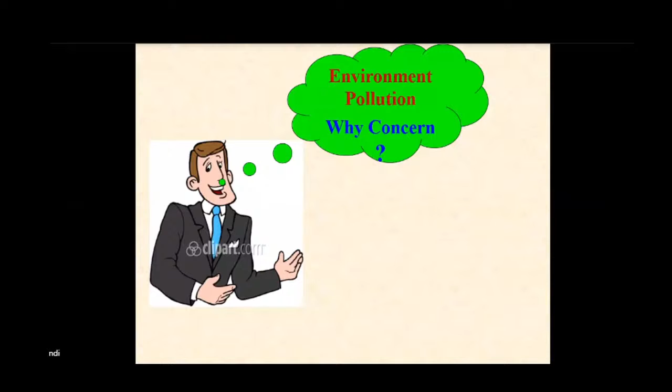Now, why environmental pollution? Why do we have to be concerned about this environmental pollution? That is mainly because our power generation—as of now, our installed capacity is around 374 gigawatts. Of that, almost 63% comes from the thermal group. That is a major concern about our environmental issues, and presently major power comes from fossil fuel.

Also, one more major concern is that some of the plants installed during the 70s and 80s have very, very poor performance. Still, because of economic considerations, this continues, even though a lot has been done by the government to revamp those power plants. But still, some of the power plants are operating with very poor performance, and that is also a major concern about environmental issues.

Hesitation in technology upgradation is also a major concern, because almost all the older power plants used subcritical cycle technology. Now supercritical has come, ultra-supercritical has come, and IGCC technology also has come. But even with all these advances, many power plants still work on subcritical technology. Also, technology upgradation like variable frequency drives and so many other things—many power plants still have not adopted them. That's what causes this environmental concern.

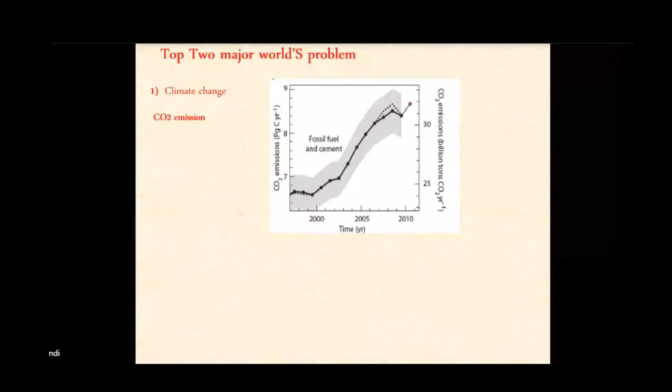Now, there are two top major problems in the world: climate change and CO2 emission. CO2 emission is the major concern. You can see the graph going very steep between 2000 to 2010. Now it has slightly steadied, but it is still increasing.

The effects will be global warming and sea level rising. These are the issues with CO2 emissions, because if CO2 emissions increase, it will cause ozone layer depletion. Those are the issues with CO2 emissions, which we will study in detail.

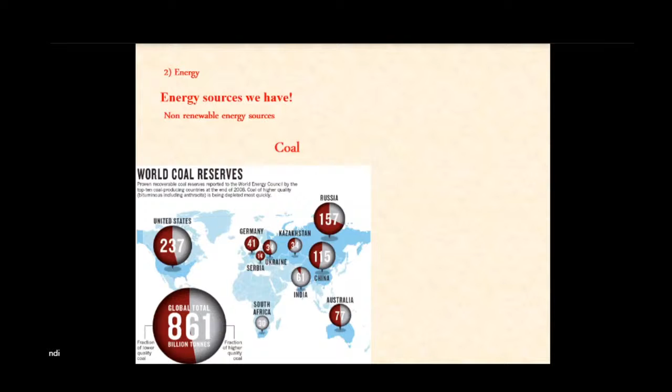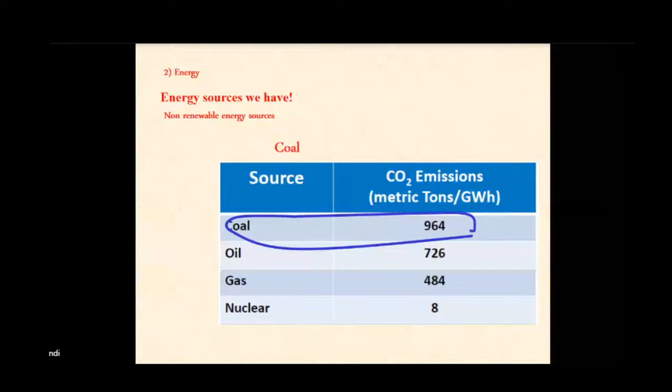But one more thing is renewable energy is also taking over because of the present government's initiation. We will discuss this in the next slides. Okay, this is regarding carbon emission.

The major difference is because their per capita energy consumption is very high. US is almost around 12,000 kWh per person per year, whereas in India it is hardly 1,020 kWh per person per year. That's why we have carbon emission per capita energy much lower than the world average.

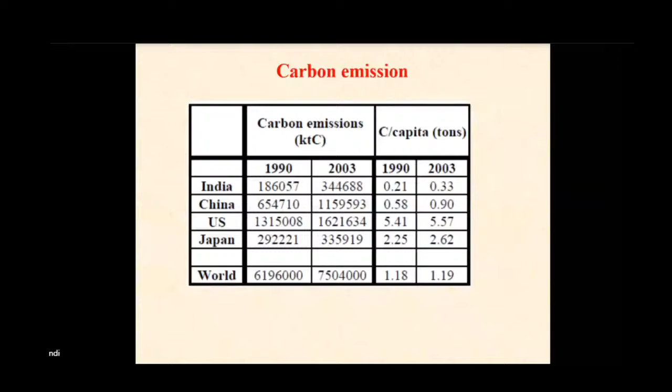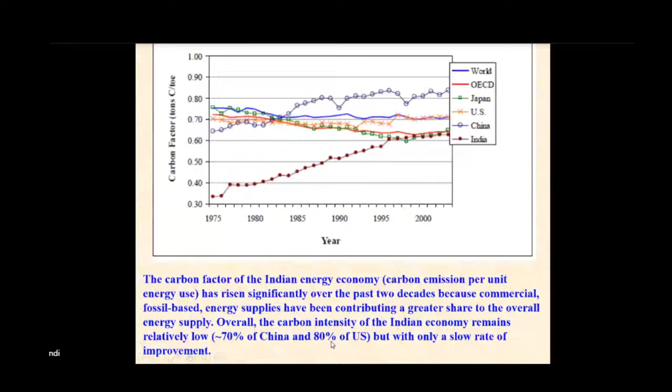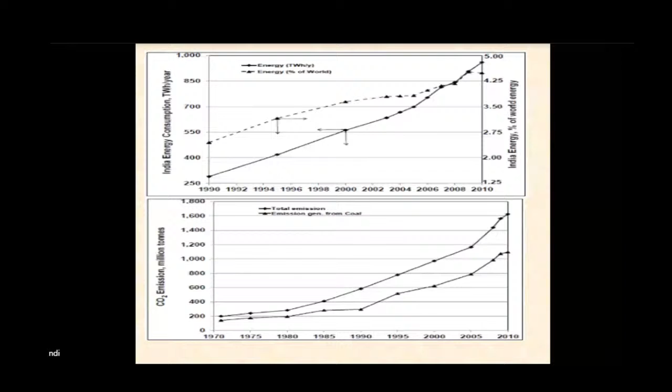Almost around 5 mega power projects have come up, consisting of around 800 megawatts into 5, that is 4,000 megawatts in a single station. With initiatives like this by the Government of India, along with private generating companies and renewable energy systems, our peak demand and supply gap has reduced.

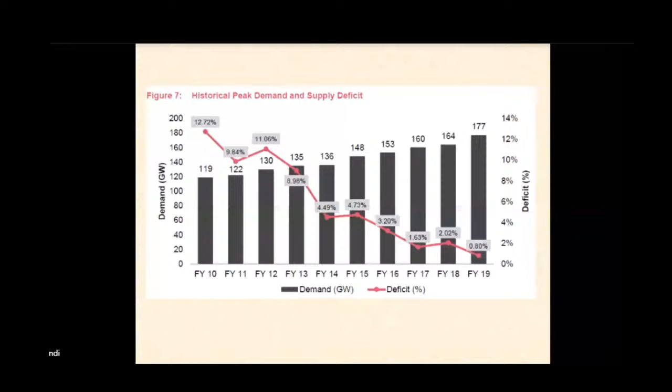Almost it is around 0.8, that is not a major concern. Similarly, regarding the energy supply also, the deficit and demand gap has come down to almost 0.6. Many power plants are being forced to take outage because of non-availability of demand. Now this is the scenario.

This is the installed capacity in India as per August 31st, but as of now it has increased to around 374 gigawatt. Another 2000 megawatt has been added in the last 3-4 months.

Now, why I'm showing this is you can see coal and lignite based power plants are almost 55.3%, gas is 6.7%. Oil has come down because oil based power plants have been converted into natural gas. One example is Tata Power's 500 megawatt oil based power plant, fully converted into natural gas.

Hydro is around 12.3%, nuclear is in a slow phase at 1.8%. Renewable is the major one, almost around 89 gigawatt power is being generated. That's our Prime Minister's aim also, by 2022 it will be around 175 gigawatt, our plan to set up renewable energy.

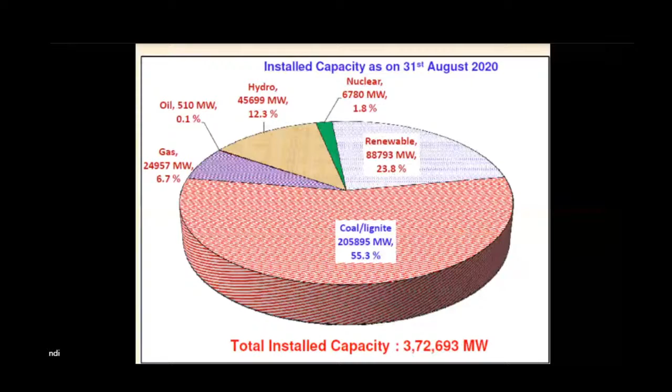Regarding the generation addition capacity, you can see here still thermal is the major addition, but after 2014 onwards a lot of renewable energy power plants have come. You can see the change here at the bottom, the green has increased, mainly because of the government's initiative to go for renewable energy.

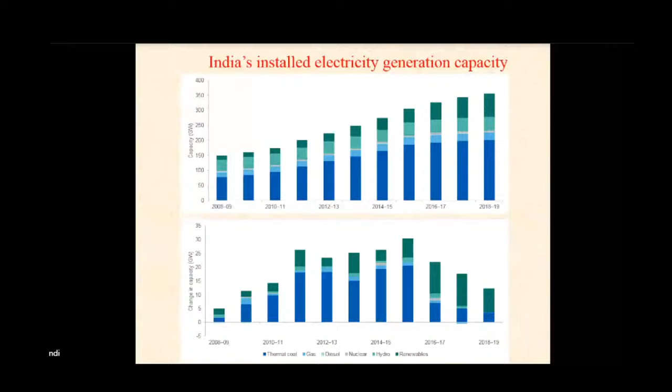Our Honorable Prime Minister and the France Prime Minister started the ISA, the International Solar Alliance. In that, 121 countries have come together, initiated by our Prime Minister. These two countries are going to train them and give technical support for setting up solar PV power plants. Under that, we are going to start some MTech program also in REVA University to train engineers from overseas, from the 121 countries.

As of June 19, coal generation is around 201 gigawatt, renewable is 79, and hydro. By 21-22, our Prime Minister mentioned in one of the conferences that renewable energy will go up to 175 gigawatt. By 26-27 itself, our plan is to go for renewable energy more than coal-based power plants, that is 275 gigawatt, to reduce coal. This will help in controlling our environmental issues.

The major concern is emissions with respect to India's average, which is 0.955 kg per kWh. SO2 is slightly on the higher side, but still it is less for Indian coal. And NO2.

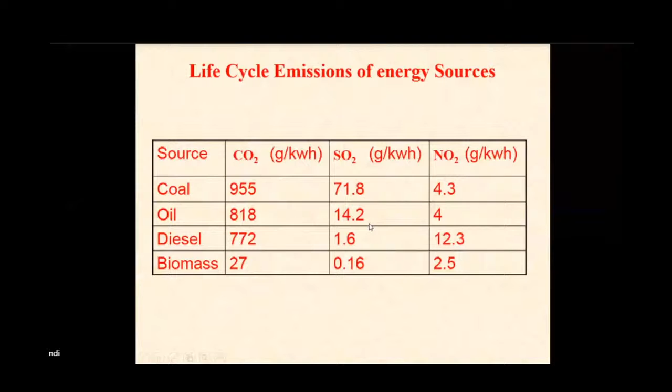This is based on data available from the internet and literature survey I have done, calculating the major concern about CO2. A person releases CO2 at around 42 gram per hour, that comes to around 1 kg per day. To compensate that, trees absorb the CO2 and release oxygen.

Considering around 130 crore population, 18 trees per person are required to compensate that CO2 emission. So at least 23,400 million trees are required to compensate for the population, for general ecological balance. Earlier, whatever CO2 human beings exhaled was absorbed by trees, and they gave out oxygen that was taken by humans. That's how the ecological cycle was balanced.

Now, because of industrialization, technology upgradation, and the addition of lot of transportation sectors, electric vehicles, power plants and all, the CO2 emission has increased. That's what I am comparing with the thermal power plant.

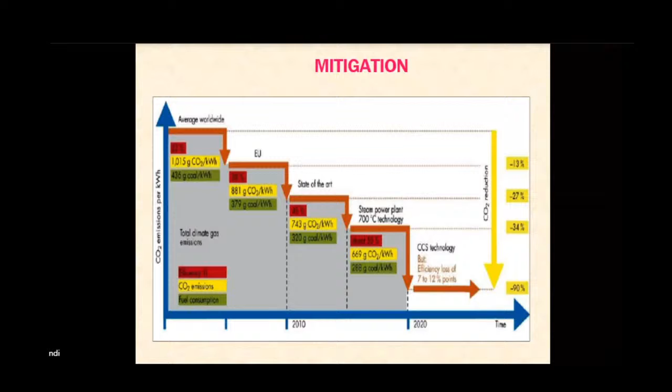One more slide, I think it's missing. Anyhow, as we go up the technologies, even if you compare with older power plants like 120 megawatt and 140 megawatt, their specific CO2 generation is around 1.4 - we have measured 1.4 tons per megawatt. Now this is regarding the power plant.

These are the components in the power plant. The major components will be the boiler. This is the boiler - in that boiler we have the water wall, and then the economizer, the superheater, and the reheater.

In this boiler, what happens? The feed water comes from the HP heaters and goes to the economizer. After the economizer it goes to the boiler drum, and from the boiler drum it comes to the water wall - sometimes called the evaporator. In the water wall, latent heat is extracted from the combustion chamber. The steam goes up to the saturated level, then afterwards it goes to the superheaters. After the superheater it comes to the HP turbine.

Normally bigger plants, more than 110 megawatt - because less than 60 megawatt plants will have only two turbines, HPT and LPT. Whereas higher power plants will have HPT, IPT, and LPT. In some places two IPTs will be there. HPT is high pressure turbine, IPT is intermediate pressure turbine - sometimes called MPT, that is medium pressure turbine. And last is the LPT, low pressure turbine.

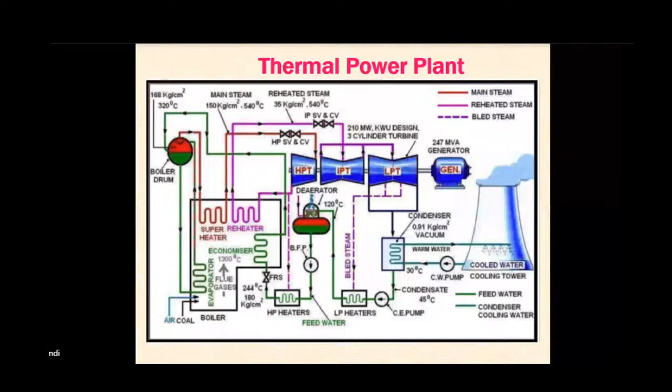Now, these are the major equipments: boilers, turbines, auxiliary power equipments. In auxiliary power equipment, ST auxiliaries, that's what I was telling: boiler feed pump, condensate extraction pump, induced draft fan, forced draft fans, primary air fans, mills. And the outlying auxiliaries like CWP, that is circulating water pump, crushers, air compressors. Any of these things we will see later on.

This is the schematic of that, already I have shown this one. Regarding this, you can see this is the chamber, that is the furnace. These are the mill outlets, it comes here, and then coal is burnt here. Then it comes to the air preheaters, APH, and then it comes to the ESPs. After that ID fan it comes, then it goes to the chimney. This is regarding the flue gas circuit.

To convert that, air has to be supplied. In air, there are two types: one is primary air and the other is secondary air. Both the airs will be heated in the air preheater. Secondary air is supplied by the forced draft fans, that will go to the chamber here. A wind box will be there, it will provide what you can call the atomizing air.

Then one more air, that is primary air. Primary air is supplied by the PA fans, that will go to the mills. In mills, the hot air will mix with the coal, and the main aim of the primary air is to lift the coal from the mill to the burner. The coal air mixture temperature and flow is also very, very important in combustion.

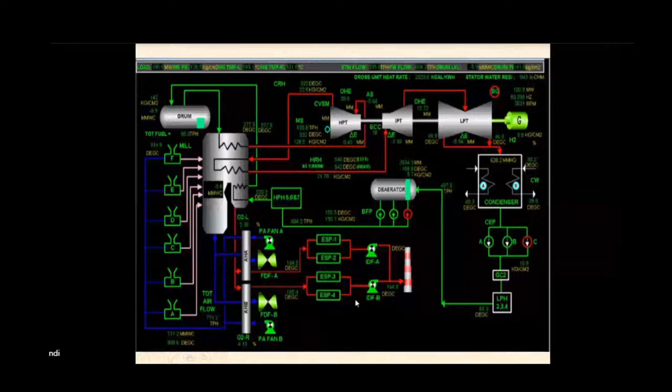This is regarding the condensate and feed water circuit. Already I have discussed this, that's what I was telling. You see, from the condenser it comes to the deaerator, and then after the deaerator it comes to the boiler feed pump. Then it comes to the HP heaters. This is a reheat cycle, then it comes to the regenerative feed heating cycle, then it comes to the economizer and then the drum.

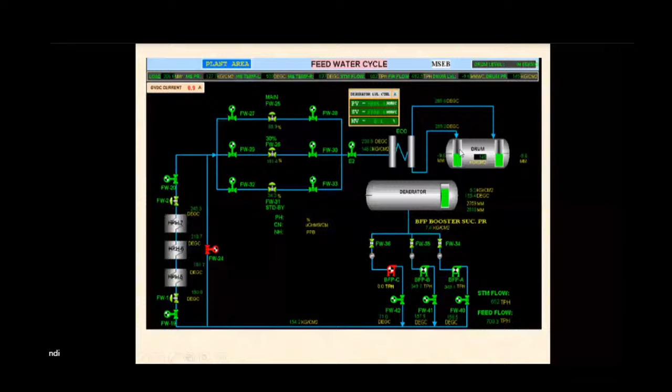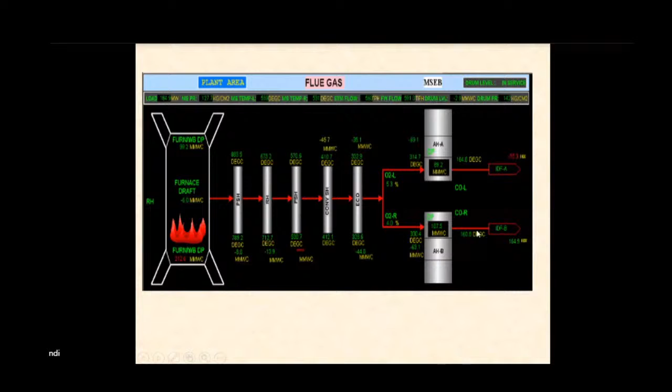We will see here how the flue gas will flow. Actually this is the furnace, I was telling minus 6 is there, these are the live figures we have captured. Then this is the final superheater, and this is the reheater, and this is the platen superheaters. This is a final superheater, reheater, and this is the platen superheaters. Then convective superheaters, economizer, then it comes to the air preheater, goes to the ESP here, and after that it goes to the ID fan.

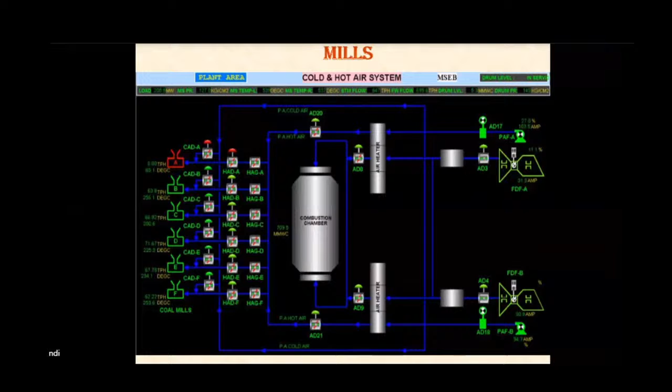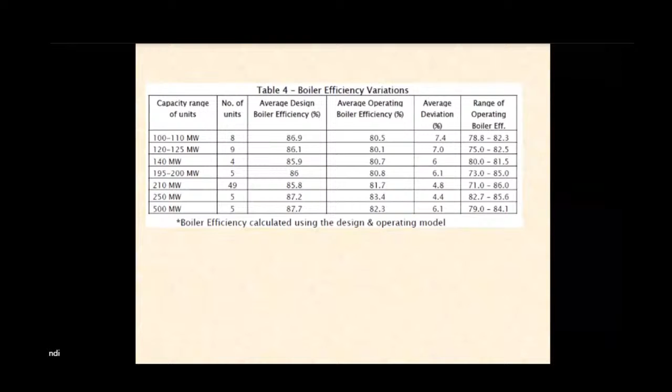These are again different. This one also depends on the aging of the plant, because as the age increases, your efficiency comes down. That's why generally in thermal power plants, they take two types of overhauls: annual overhaul and capital overhaul. Capital overhaul they take once in 5 years, but annual overhaul they take once a year.

Once a year, what do they have to do? They take about 20 to 28 days. Earlier they used to take more than a month, but nowadays they have optimized it. Whatever are the prone parts, they will only rectify and then replace. But because of the non-availability of schedule, many times these overhauls are taken

during the rainy season, the monsoon, because during monsoon all the hydropower plants will be at peak. At that time they will take the overhaul. But many times, even during that period, if sufficient power is not available, they were not giving the clearance for doing the overhaul. So what they used to do is keep on operating for an extended period.

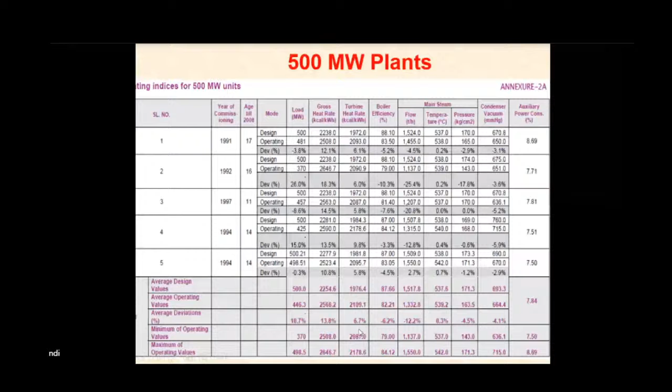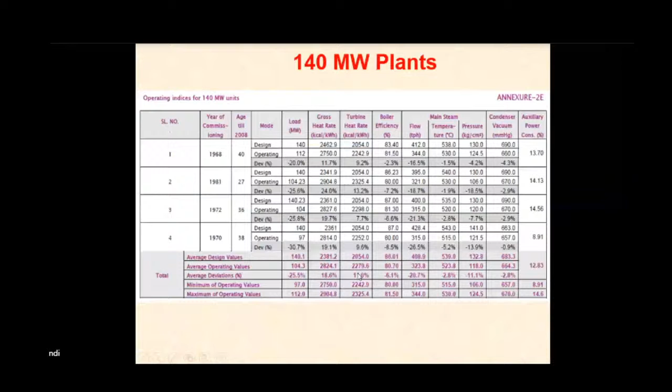This is for 140 megawatt plants. You can see here the average deviation rates are very high, this case 18.6, because many of these power plants, even 100, 110 megawatt plants, have more deviation. Many of the older power plants were of refractory type, tube and refractory type. Nowadays they have gone for membrane type of water walls. Wherever membrane type water walls are used, the performance is better than refractory and tube type furnace.

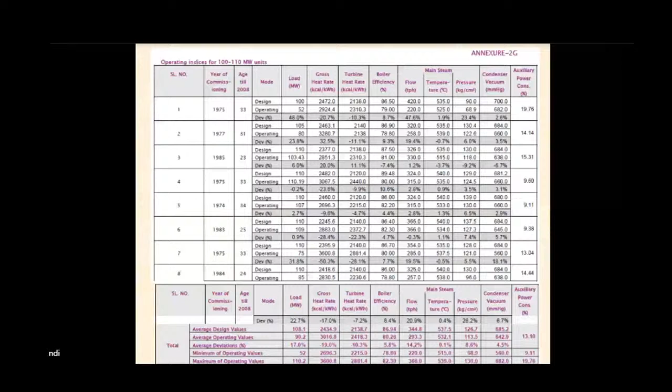What are all the reasons for higher heat rate? First one is the low combustion efficiency leading to high carbon loss. That is the efficiency we have seen - the boiler efficiency was less.

If efficiency is less, to produce the same steam output you are burning more coal. Burning more coal means you are adding more ash, more ash and more temperature in your flue gas and CO2 emission. If your combustion efficiency is improved, then automatically you can reduce all these environmental issues.

Then higher forced outages, especially in these older units, because as the life goes on, the water wall gets affected - because of higher ash content, the erosion rate is more, especially in boiler tubes, in superheaters or economizer zone. There the ash erosion rate is more for the boilers.

Also, many times what happens - our boilers are corner fired and the fireball has to be created in the center. We are firing from all four corners to make the fireball go to center. Many times if there is a mismatch in burner operation...

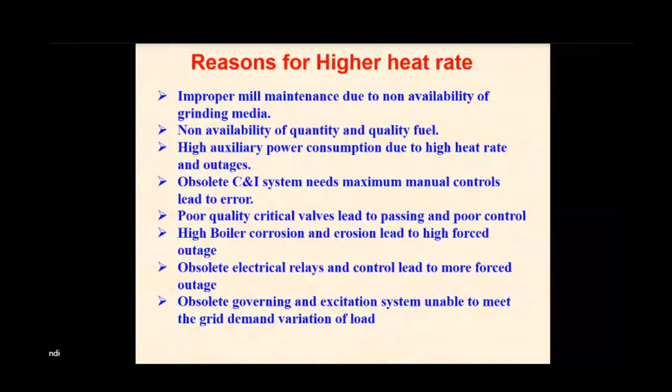These are the major concerns, but the environmental issues are mainly because of coal quality. If the coal quality is better, performance will be better and environmental issues will be less. Nowadays our Indian coal quality has gone down because our boilers are designed for a calorific value of around 4,000 kilocalories, but the present available coal quality is around 2,600 to 3,000 kilocalories per kg.

Because of that, the burden on the power plant increases. We carried out a study at the Raichur thermal power plant during 98 or 2000. Because of the coal, they were unable to load the plant to 210 megawatts; they could only operate up to 180 megawatts, because of the high ash content coal and lower calorific value. That's why they went for importing coal.

The ash content is very less in these, whereas our Indian coal, the ash content we have measured up to 55 to 60%. As ash content increases, the burden on your ESP increases, and the burden on the ID fan increases, and automatically your performance goes down, adding to your environmental issues.

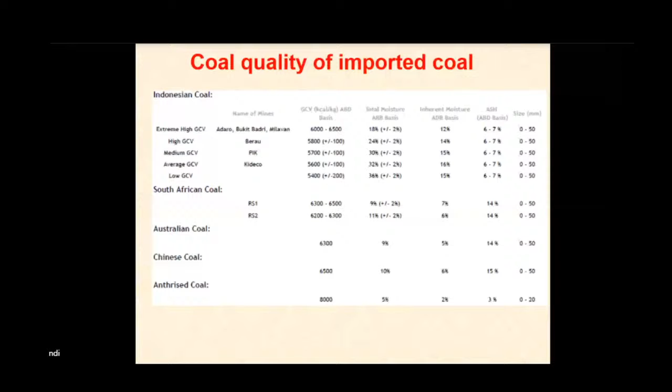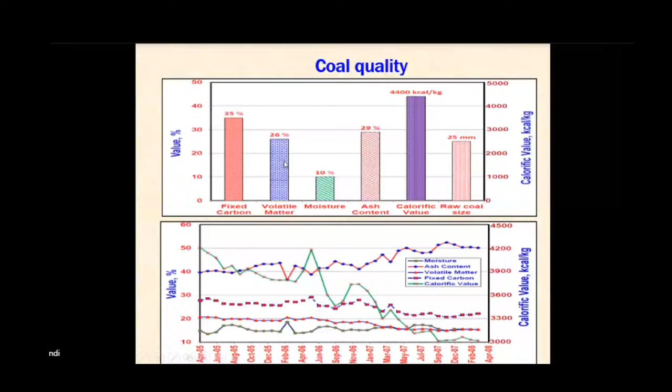These are the generally designed values. In one power plant we carried out a study up to 2008. Over the period of time, the ash content has increased, and the calorific value, shown by this green line, has come down. These are the designed values, and this is what I have shown here.

Again, as I was telling, as the calorific value of the coal increases, your heat rate comes down, meaning your performance will be better. But over the period of time, the heat rate has increased and the calorific value has come down.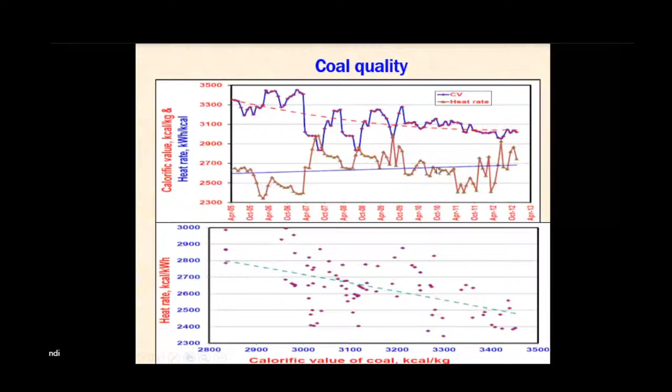At the same time, if the calorific value of the coal increases, the specific fuel consumption to generate 1 kWh will be less. And at the same time, the auxiliary power also comes down if the calorific value of the coal is better.

If the calorific value is better, you can see the increased power, that is the power consumption of major auxiliaries, ID fan and FD fan. You can see here, ID fan power is reduced almost by about 30% by improving calorific value from 2,500 to 4,000.

At the same time, CO2 emission, you can see here almost around 0.77 ton per hour for ID fan alone, then mills, FD fan and PA fan. This is with respect to the calorific value.

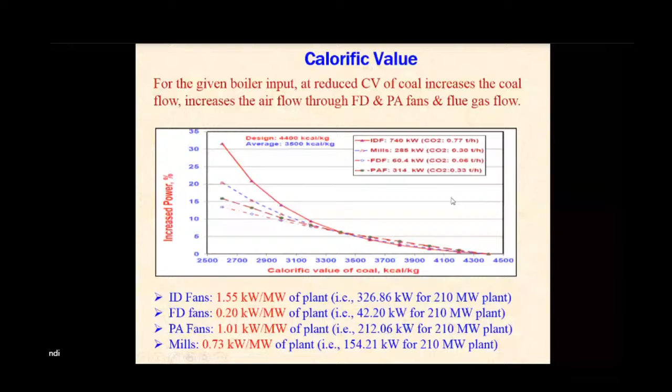Regarding the ash content, it's the other way. As ash content increases, your loading on the ID fan increases. You can see here your power consumption increases almost around 35% as the ash content increases from 20% to 60%. Similarly for FD fans, PA fans and mills.

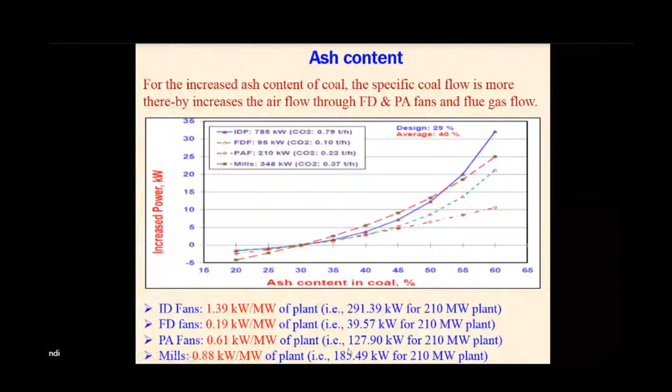In the coal's ash content, quartz will be there, and the erosion rate for quartz is more - that's what eats away the metal.

Then again, moisture content of the coal also matters. If the moisture content is more, even your furnace size requirement will be high, and the size of the mills is more, and auxiliary power required by the mill also is high.

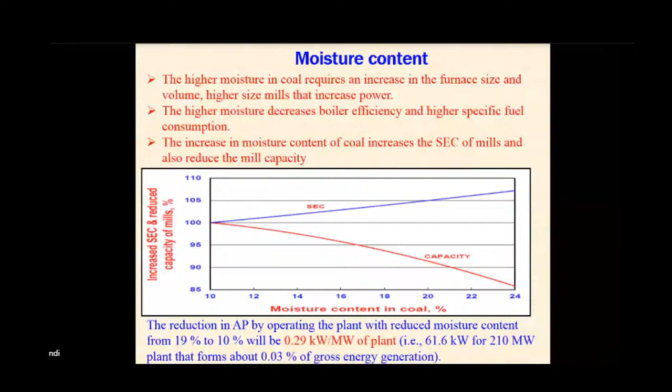Then the hard groove index - this is also a very important parameter. Generally our boilers are designed with 50, that is 50 to 55. That is what our Indian coal hard groove index is, 50 to 55.

But some of the imported coal has a lower hard groove index. If the hard groove index is less, your grinding power requirement is high. You can see here, the mill power requirement will be high as the hard groove index gets lower.

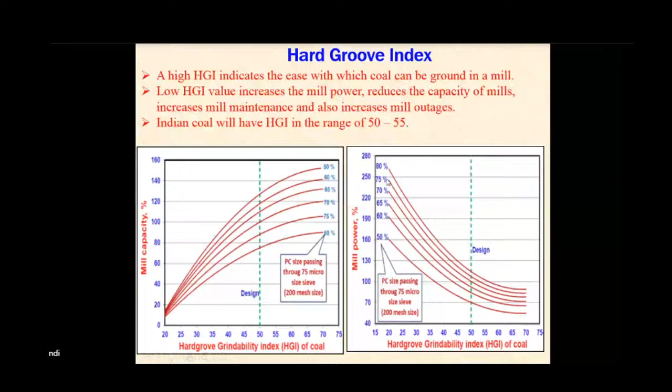You can see here, Melawan coal has an HGI of 42, whereas the Ecocoal has an HGI of 60. You can see here the specific fuel consumption of this particular mill is higher. Since the HGI is high, your specific energy consumption is less. So hard groove index also matters on mill performance.

And also the fineness is important - that is the coal fineness. It should be below 75 microns, around 70% of the coal should be less than 75 microns.

But in many plants you can see, in this particular mill it is only 57, 67, 55 passing through - it should be more than 75%. Here you can see it is 77, so this particular mill seems better compared to that mill. But here you can see again, in this case it is more than 80%.

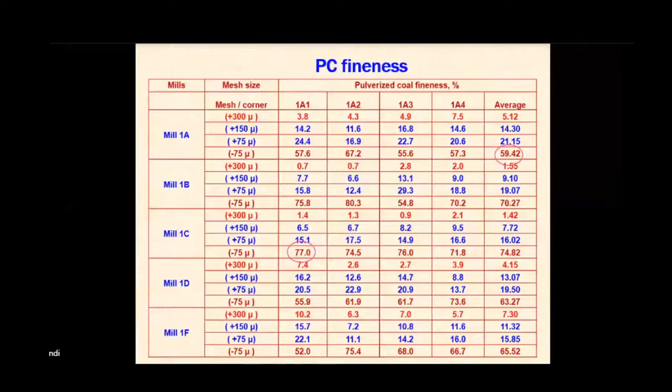If the particle size is bigger, a coarse particle, then in the combustion zone before burning, because of the weight it may fall down and unburnt carbon in the bottom ash increases. So you have to optimize the fineness also. As the percentage passing below 75 microns increases, your mill power will increase.

Another major problem with these mills is the raw coal. Generally, the coal comes from the wagon, then it comes to the coal handling plant. The wagon tippler tips the coal, and then it goes through the conveyor.

Because the construction of the crushers is different, primary crushers generally go for hammer type mills. In hammer mills, it hits the bigger coal and the specific energy consumption is less, but the performance of sizing the coal is less. In the primary crusher, it reduces coal to around 125 down to 50 or maybe 75 mm. Then that goes to the secondary crusher, which reduces the coal size to below 25 mm.

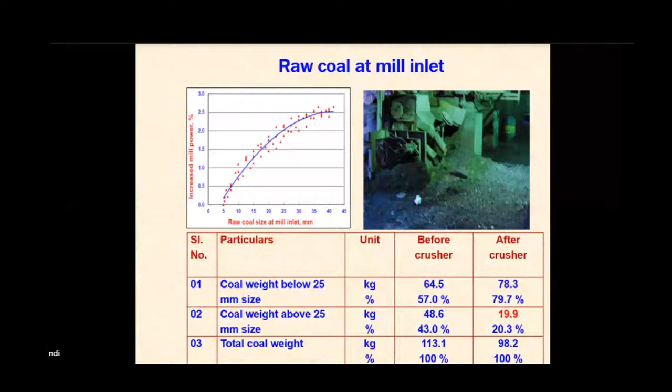Stone pickers will be there on the conveyors, because these stones cannot be allowed inside the mills or even in the crushers. Before that, stone picking has to be done, and then they dump it in the coal yard.

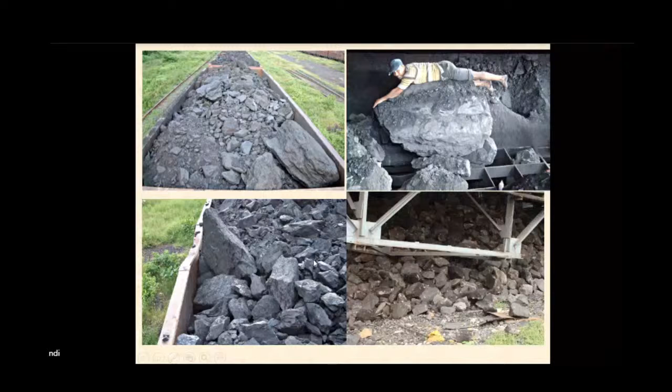Then again, about washed coal - what washeries do is wash the coal to reduce the ash content. You can see here, this is the ash content for raw coal, and this is washed coal - the ash content has reduced. Thereby, your plant performance increases because the ash is reduced.

At the same time, your calorific value (CV) increases. You can see here the range we have actually got from the field, and this is also washed coal. Also, by washing the coal, you can reduce the quantity by almost around 20 to 25%.

Using washed coal in quantity, you can reduce the transportation cost also. Generally, washeries are kept near the collieries, because from there, they can reduce the transportation cost by using that washer.

Some performance improvements, like plant efficiency increase, we will see here. We have carried out some study here. By using washed coal, the ash content has reduced from 52% to 31%. The CV has increased from 3,000 to 3,550.

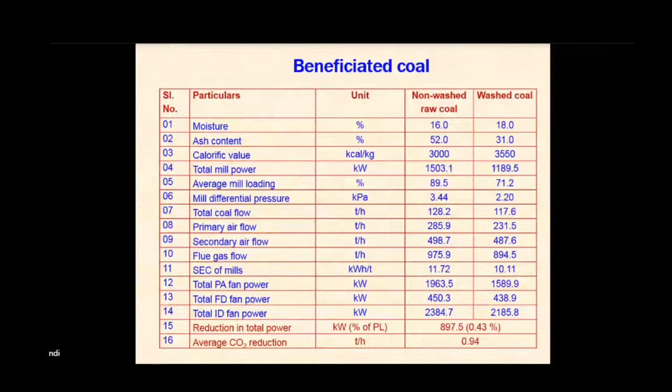This is another case, Satpura Thermal Power Station, that is NTPC. They have presented this in one of the papers. PLF increased from 73% to 96%, because if the coal quality improves, your plant loading capacity increases.

Coal consumption is reduced because your specific coal consumption comes down, as you are removing the ash. If you burn coal without washing, you unnecessarily add all the ash into the boiler, because ash causes erosion through quartz content. By washing, you can reduce the erosion rate.

That's what reduces your auxiliary power. Downtime, especially boiler tube failures, will reduce drastically by using washed coal. With no fuel support, boiler efficiency improves by about 3%. Mill power consumption has also reduced, as they have presented.

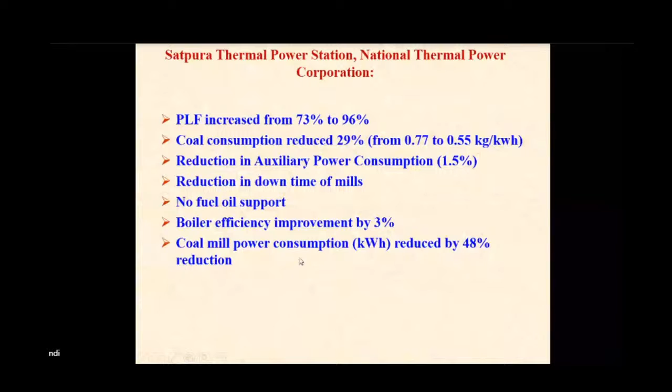In washed coal, they also have a crusher, so the size of the coal has come down drastically at the collieries itself. Instead of getting boulders which take time to clear, that time is also reduced, helping reduce demurrage charges and increasing operating hours of the plant.

Operation improves because mill outages come down and the erosion rate inside the furnace reduces. Increase in PLF means the plant output can increase. There's also increase in utilization factor, reduction in breakdown period by 60%, increase in overall efficiency, and increase in generation.

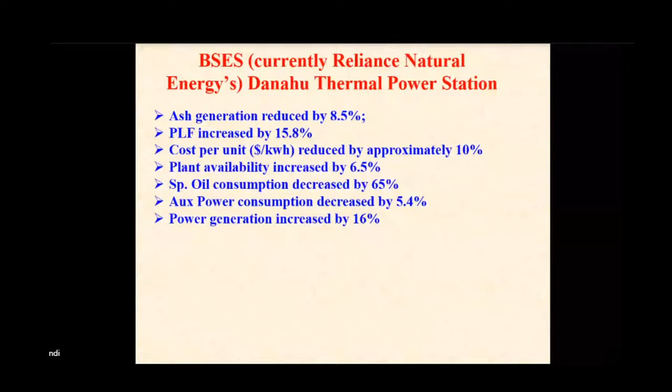This is another example, Dahanu Thermal Power Plant, that is BSES, Reliance. Their ash generation reduced by 8.5%, PLF increased, cost per unit reduced, and auxiliary power has come down. This is regarding the beneficiated coal, that is washed coal.

Now, coal blending. As I was telling, imported coal has a calorific value of more than 5,000 or 6,000. Earlier, we have even seen Australian coal up to 8,000 kilocalorie per kg. But the problem with imported coal is that higher calorific value coal cannot be burned directly in our furnace, because our boilers are designed for 4,000 kilocalorie per kg initially, and later some boilers were designed for 3,700 kilocalories.

For that particular design, only if you burn coal matching that specification can the boiler perform well. If you go for higher calorific value coal, like 6,000 or 5,500 or even 8,000 kilocalorie, the burning rate will increase.

Your latent heat extraction has to be increased. In that case, the size of the water wall has to be increased, because your latent heat extraction comes down and your superheat, that is the convection superheaters, there the heat extraction has to increase.

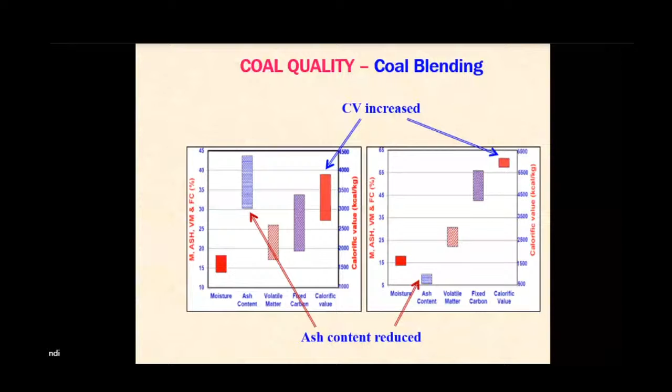That's why instead of this, they do tier blending. Tier blending in the sense, there are 6 tiers in a corner-fired boiler, that is A, B, C, D, E, F. In that, one mill goes for imported coal, and the remaining 4 mills go for Indian coal. Thereby they can increase the efficiency.

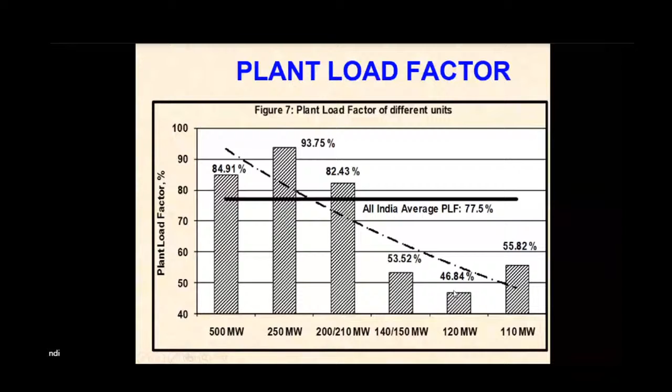Again, we have carried out some study in the Dahanu power plant, that is Reliance, using different coal. You can see here poor coal versus good coal with a CV of 4,600. There they were using Indonesian coal and Indian coal also.

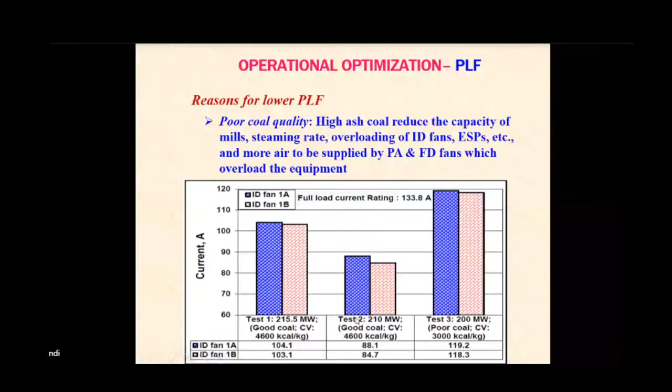With good coal, the ID fan current is less, but with poor coal, the ID fan current has gone much higher. Here you can see the plant capacity also we have seen - the margin is very, very less in case of poor coal. That's what your efficiency will be less, your auxiliary power consumption will be very high in case of poor coal.

Here you can see the efficiency of the ESPs also. Generally they say ESP efficiency will be 99%. But if your ash content is more, the burden on the ESP also will increase, and your efficiency comes down. If your collection efficiency is less, the ash content goes, and the ID fan has to handle that, causing more erosion of ID fans.

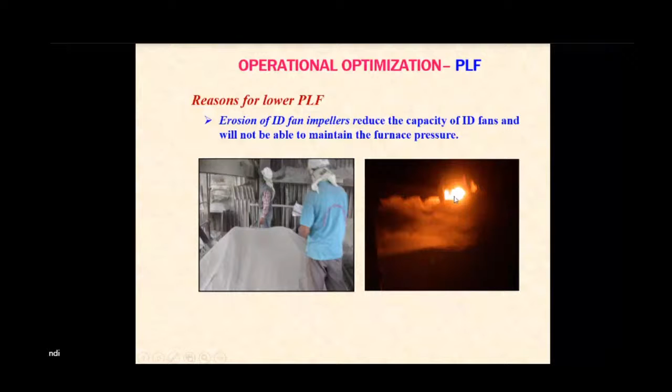You see one of the power plants, you can see this is the ash puffing. Actually this furnace is working with positive pressure. You can see here manholes - these are all causes for the air ingress. Just I will skip some of the things.

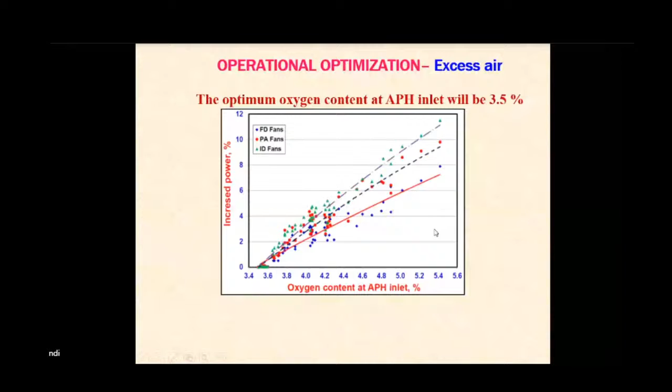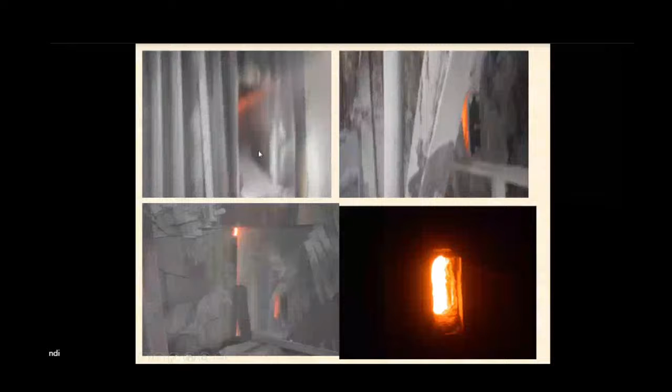Again, you see this is positive pressure - you see this, it's coming out, the flame is coming out. It is very dangerous to go around this one. The temperature surrounding the boiler will be more because of this puffing, and that's what I was telling.

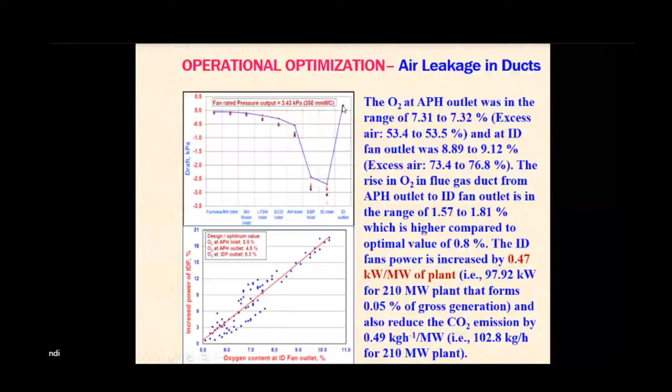You see the furnace pressure at the furnace will be on the negative side. This all will be negative. Only at the ID fan outlet it will be more - that's air leakage. And the flue gas pressure drop in the APH also causes more auxiliary power for the ID fans, and that also reduces the capacity.

This is one of this one. Again, for proper combustion, your excess air should be maintained around 17 to 20%. Why excess air? Because converting total carbon into carbon dioxide is our main aim. If you give only theoretical air, there may not be enough to convert full carbon into carbon dioxide.

What happens if you don't provide that? Then your unburned CO formation will be more, and CO at your boiler outlet will increase. If the CO is more, it is hazardous for human beings as per the CPCB norms.

CPCB norms state it should be less than 100 ppm. At the same time, the ash particle, that is particulate matter at the exit of the chimney, should be around 150, but now they have revised it to 100 milligram per Nm cube. But at the atmosphere at any point, if you measure particulate matter 10, the value should be less than 100 microgram per meter cube.

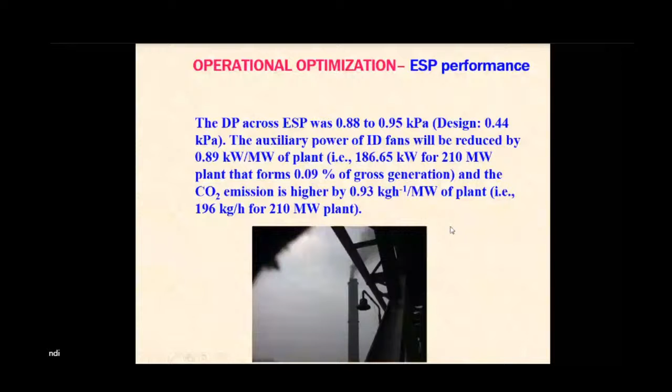You see the dust concentration at ESP is actually around 1060 to 9319 milligram per Nm cube as measured. As per the design value, it should be around 100 milligram per nm cube. But during the test also you can see here 1600.

What happened? This is mainly because of the non-operation of the ESPs. You see, ESPs are designed for 60 kV DC voltage, and it was varying between 17 to 40 because of some problems, and current also it was varying between 40 to 200. It means it is not able to load. The collection of the plates is very poor. That's why your dust concentration at the ID inlet is very high.

Because of this high dust concentration at the ID fan, every 6 months they have to change the ID fan impeller. Otherwise, the ID fan will not create sufficient negative pressure, because the main aim of the ID fan is to create negative pressure in the furnace.

If it is not able to create that negative pressure, generally in a power plant, if the pressure goes to around 10 mm of water column, it will give an alarm, and if it goes to 15 mm of water column, it will shut down the furnace. That is the condition. To maintain that, sufficient suction has to be created by your ID fan.

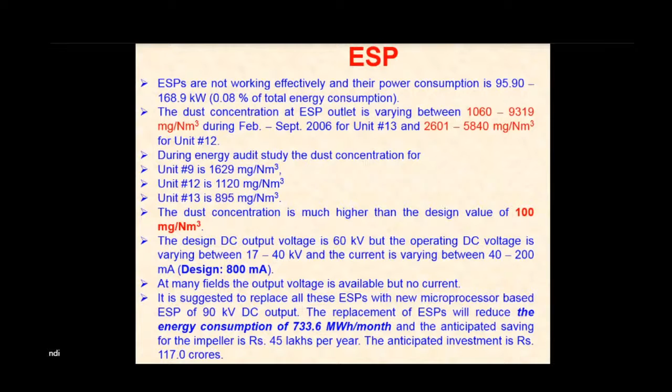One more power plant we have seen, in MSEB, that is Parli or similar, there we have seen they were using ammonia injection into the flue gas. By injecting ammonia in the flue gas, the resistivity of the dust, that is the ash, comes down. If the resistivity is less, the collection efficiency of your ESP increases.

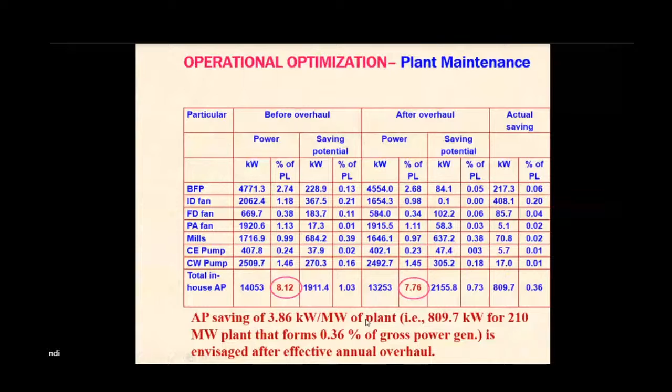These are some of the things already discussed. Boiler efficiency, and some of the ID fan performance we have measured.

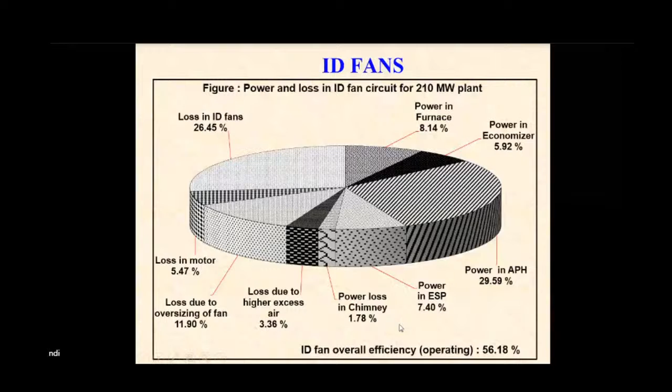56.18%. In that, what are all the components? Pressure, you see minus 5, then it goes to economizer inlet. APH I was telling around 80 to 90. Then again ESP. These are the operating points, and this is the design value, and this is the gap between design and operating.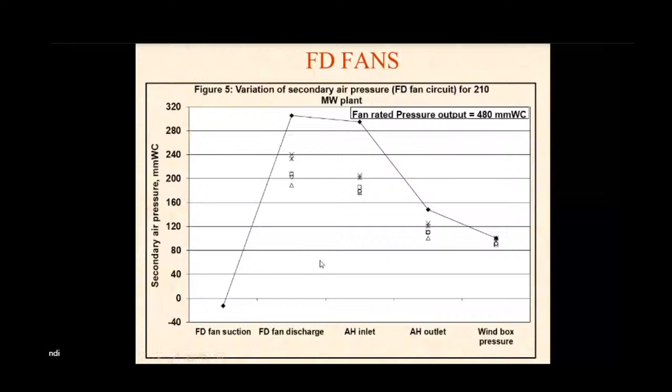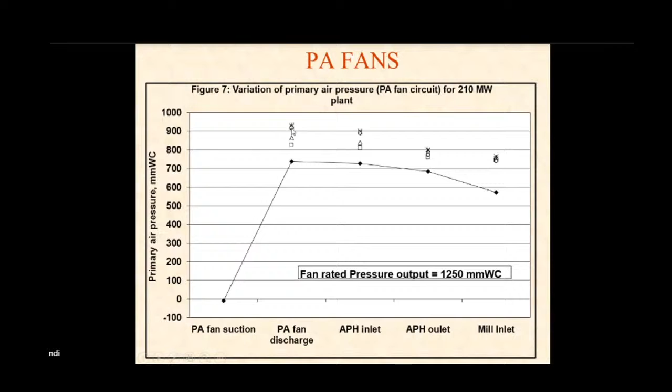In that, again the pressure, this deviation, and this is the power, auxiliary power. These are the PA fans. PA fans generally design pressure will be around 1200 to 1250, but operating will be on the higher side, mainly because of the leakages and other things.

Again, this is the power consumption, you can see the gap between the design value and the operating value. These all add on to your environmental issues.

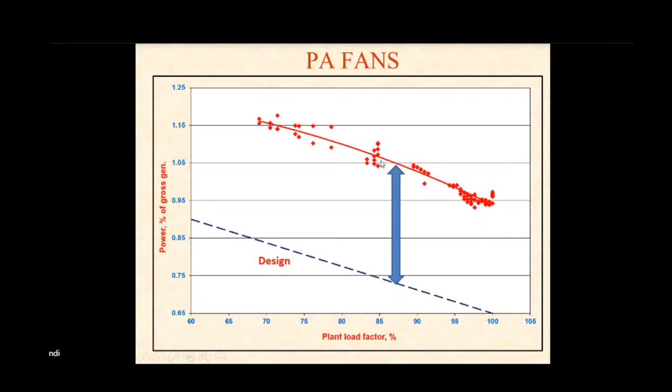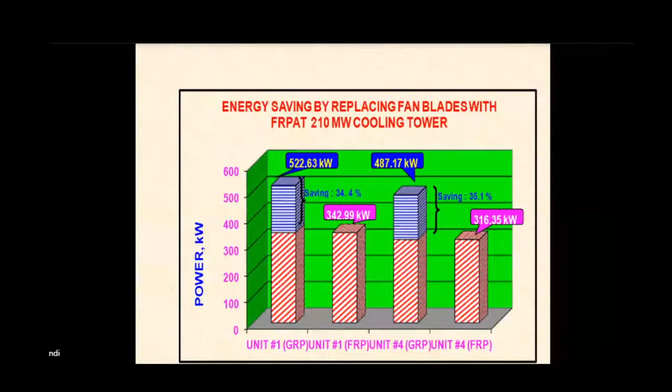And then again, cooling tower. We have carried out some study in an NTPC power plant, where by replacing the FRP fan, they were using GRP fan, by replacing with the FRP fan, you can save the auxiliary power.

With this I come to the conclusion: operating the plant at higher PLF will reduce CO2 emission, use of coal blending will reduce the emission. Operating the plant near MCR condition, that is the maximum continuous rating, your auxiliary power will come down, and your environmental issues come down.

Operating at optimum excess air, generally we maintain around 20%. If it is more than that, higher excess air causes your dry flue gas losses to be more, and your auxiliary power by draft fans, that is ID, FD, PA, will increase.

And furnace ingress, that is a major concern in many power plants. Furnace air ingress causes higher auxiliary power of the ID fans and capacity comes down. Again, maintenance. With all this we can reduce the auxiliary power and improve the performance of the plant, thereby controlling the environmental issues.

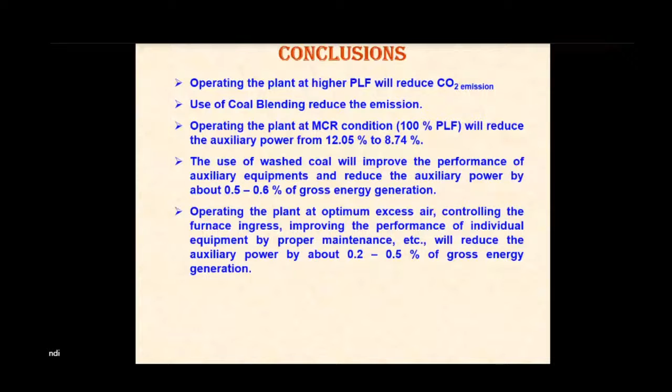Regarding the power plant, that is what we are looking for, especially on air quality and all. We are looking at dust concentration, SO2 and CO2.

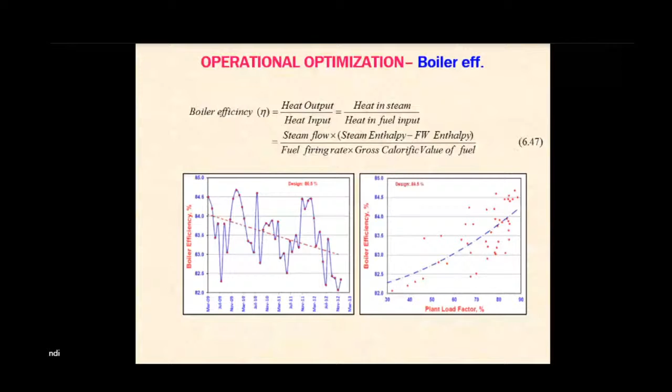Okay, there is a difference in the design, and I have shown that design value versus this one, the boiler efficiency. Modeling, whatever we do, is the design value, but the operating actual has dry gas loss affecting boiler efficiency. These figures are all models, depending on the actual type of modeling. Design-wise they have an operating 4,300 kilocalories for this case, and based on that design we arrive at this.

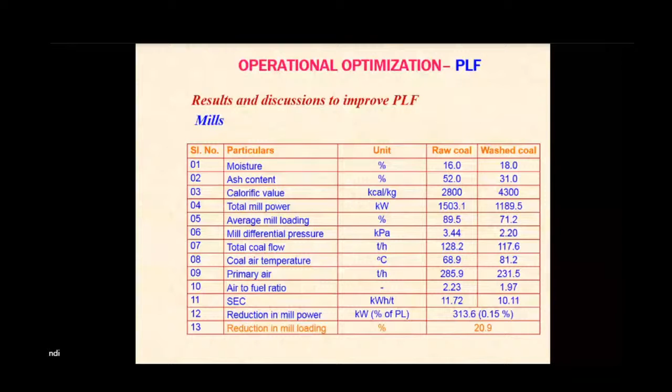Here you can see this is condensing - after the air preheater, gas temperature goes to the ESP, then it goes to this one. Here it should be around 148, but the actual value is less, and this will condense the gas. But some power plants keep it at more than that - if it is more than 148, say 160 or 170, that will avoid the acid gas condensation. That is how the boiler operates. I hope your question is clear.

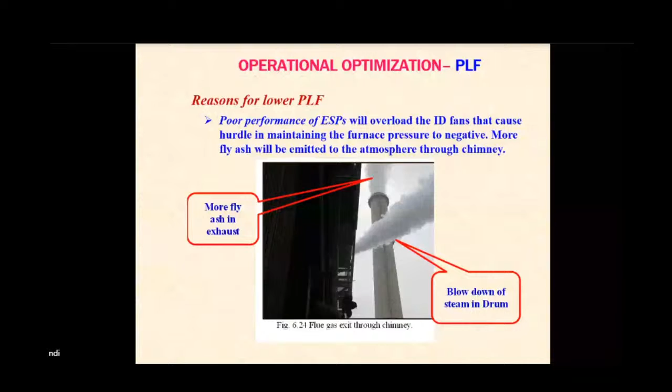Sir, one more question from Sachin, Bangalore: are there any norms for chimney heights? Yes, there are norms for chimney heights. CPCB - the Central Pollution Control Board - has brought out norms. They have provided these depending on the capacity of the boilers, for particular power plants.

One question from K. Rajashekar, IEEE student, sir: what will be the scenario in thermal power plants when EVs will be used and demand increases? Is it EVs? Is it true that contrary to belief, EVs will increase pollution rather than decrease it, as more coal-based generation will take place?

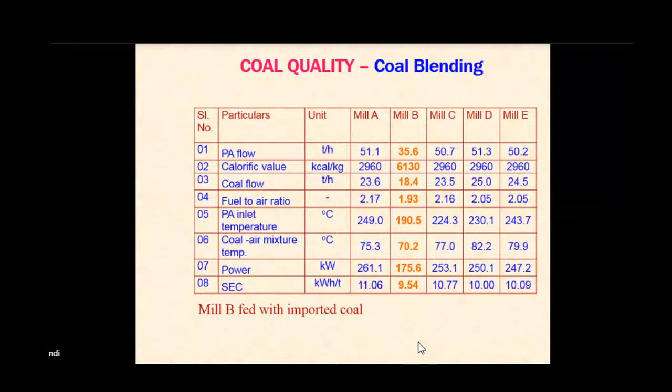Again, oil combustion in internal combustion engines produces CO, which is a major hurdle - it is hazardous. That's why we have to test all our vehicles for combustion. But in a power station, the conversion from carbon to CO2 is more - CO is very less compared to internal combustion engines. Also sulfur, that is SOx, SO2 generation, is more hazardous in internal combustion engines compared to coal-based power plants. That's as far as the environmental aspect is concerned.

EVs are better than internal combustion engines, even though, and also based on this, nowadays India is going for solar PV generation in power plants. Our honorable Prime Minister mentioned recently that in another 2 years we are going to have 175 gigawatt solar PV power plants, and near the Kutch border around 30,000 megawatt solar PV power plant has been sanctioned now - almost 30 gigawatt at a single point, over an 800 kilometer area, they are going to set up solar PV power plants.

During night time we have other solutions we are going for. As I showed in my planning report, by 2026-27 our solar generation capacity crosses coal-based power. But as far as her question is concerned, even in that way, if you go for a coal-based power plant with EVs, that is less costly and less polluting compared to the internal combustion engines used for the transportation sector.